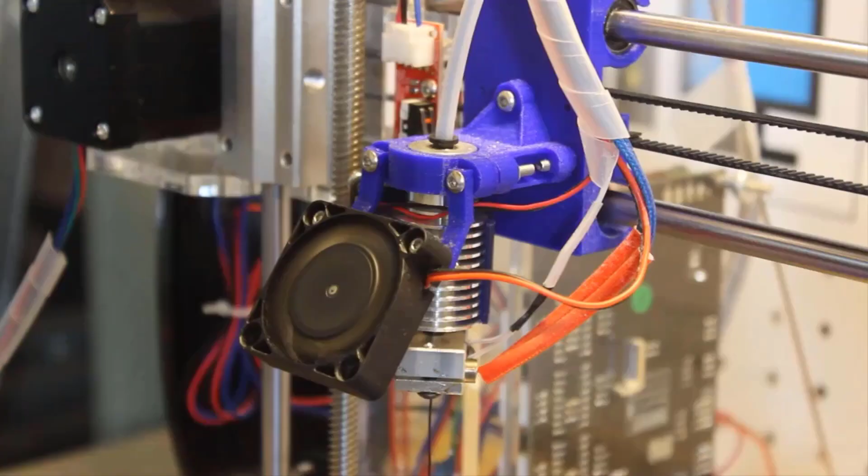FDM means fused deposition modeling. This is the most common type of 3D printer available on the market. Out of 100 companies using 3D printing, 80 companies are using FDM type 3D printers. So we can understand the market dominance of FDM 3D printers.

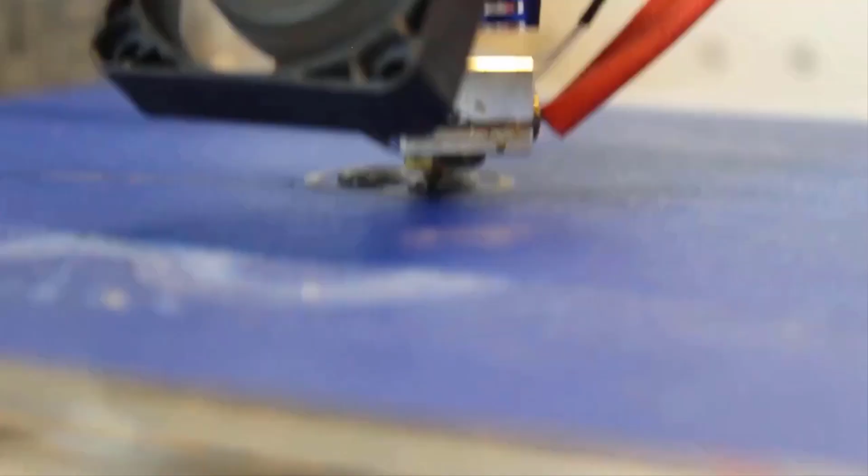So in this lecture, we will talk in detail about how FDM 3D printer works, what are the different components used in the 3D printer, and what is the mechanism of FDM 3D printer. Let's start with the working or anatomy of the 3D printer, like how FDM 3D printer works.

So what is the motion of the print bed, the build platform? In some types of FDM 3D printers, the Z-axis also moves. Once one layer is successfully printed, the platform will go down by one layer. In some cases, the extruder will move in all three directions, X, Y, Z. So this is how the 3D printer works.

Let's understand in detail the movement of the 3D printer. Here you can see these are the stepper motors and lead screws. All the motion and movement of the 3D printer is given by the stepper motors and lead screws.

If you ask how many stepper motors are present in a 3D printer, we can say there are 4 stepper motors: one for X movement, one for Y axis movement, one for Z axis movement, and one for extruder movement.

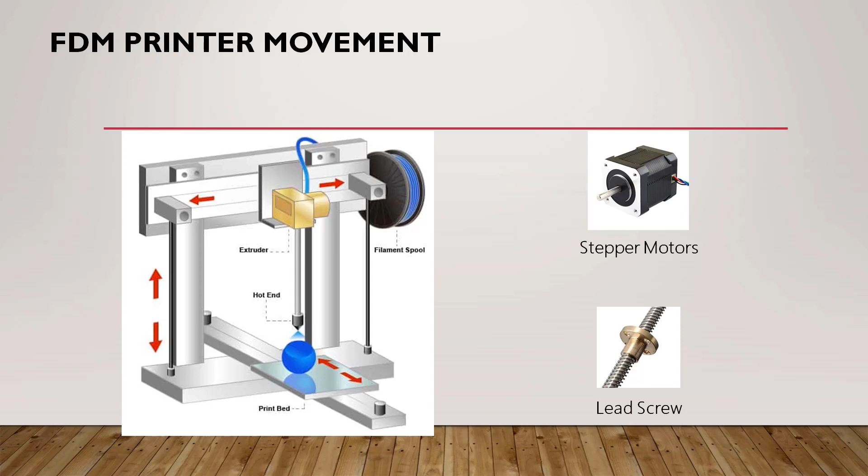Lead screws are those on which your bed will be moved. As you can see in this diagram, on this lead screw your bed will move, and other rotational movements will be based on the stepper motor. The stepper motor will rotate, then the lead screw will rotate, and the assembly attached to the lead screw will also rotate. This is how the movement of the 3D printer works.

In the beginning of the lecture, I told you about the extruder, that filament comes to the extruder and then goes to the nozzle. The extruder is the main part of any 3D printer, and the 3D printing process fully depends on how the extruder works. So let's talk about the extruder.

If I divide the extruder into two parts, there are two ends: one is the hot end and one is the cool end. The upper portion of the extruder is called the cool end, and the bottom portion is known as the hot end.

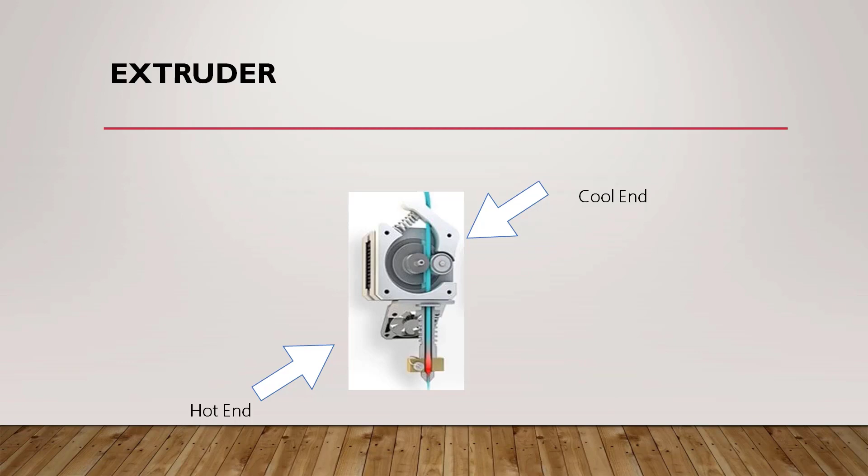Let's talk about the cool end, how it works. In the cool end there are three important components: first the stepper motor, second the hobbed gear, then the idler gear. When the stepper motor moves, the hobbed gear will also move, and the idler gear will also move, and in between we insert our filament.

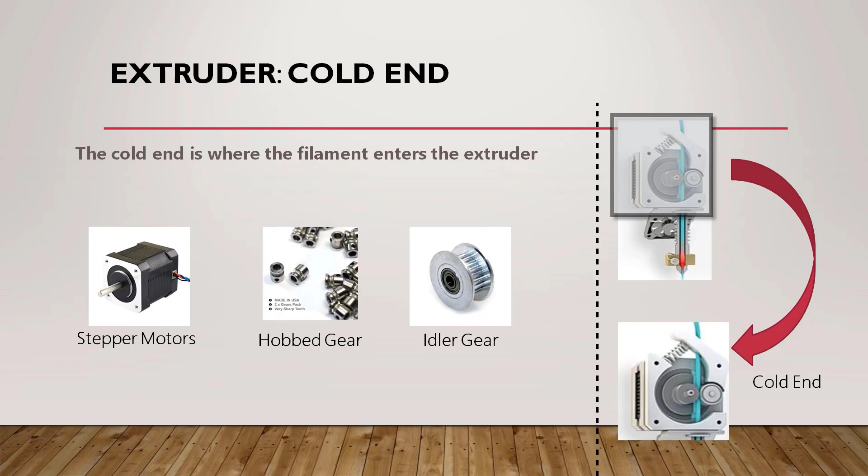So if those gears will be moved, then our filament also be moved, and this filament will go downside by the movement of these gears and stepper motor. Once it goes downside, it goes to the hot end.

So basically, what is the difference between hot end and cold end, and why we need two ends in a single extruder? As we know, when your filament goes to the nozzle, because of the high temperature at nozzle, your filament will be deformed and melted down. As the temperature of nozzle is too high, it is possible this temperature will go upside at the cool end, and before entering the nozzle, the filament can get deformed. And if this happens, that at the cool end your filament gets deformed and melted, then your nozzle will be choked and no movement of filament is there.

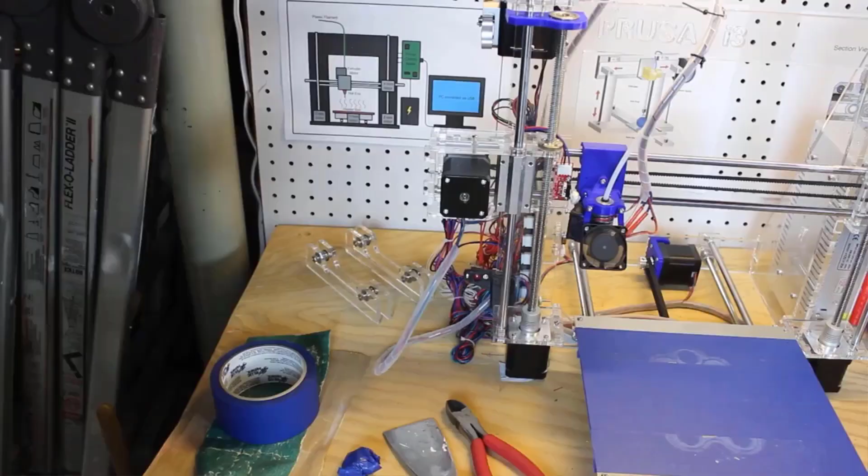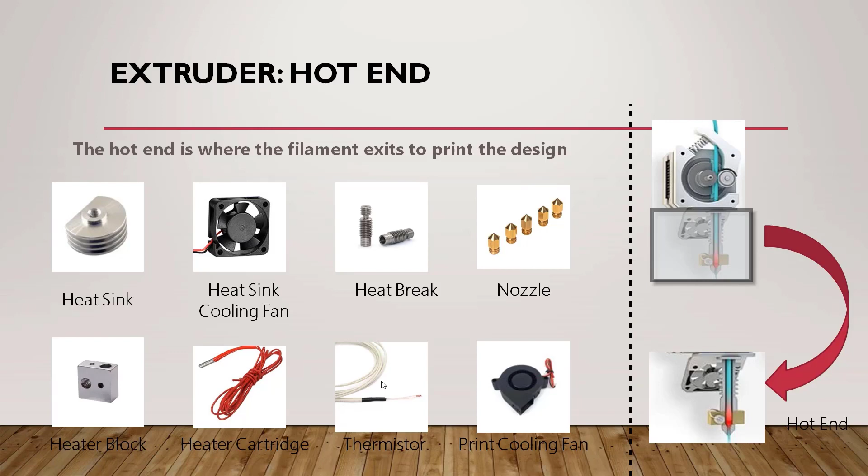If we want our temperature to be 220 degrees C for PLA, then this thermistor will maintain our temperature. Once we start our 3D printer, temperature will rise like 30, 40, 50, 70, 120. It increases rapidly, but at 220 degrees it stays because of the thermistor. These are the components used in the hot end to maintain the temperature and the working of the 3D printer. So I hope you got a fair idea about what is hot end and what is cool end.

Now coming to the hot bed plate. The hot bed plate is a bed where your model will take place. If you are using PLA, there is no need to heat your bed. But if you are using nylon, ABS, PETG, these types of material need some hot bed, because hot bed means giving some temperature to your bed. Once the layer comes down to your bed, it gets settled and sticks to the bed. Sometimes, if your bed is not hot, your layer will not stick to the bed and your whole model will not turn out like you wanted.

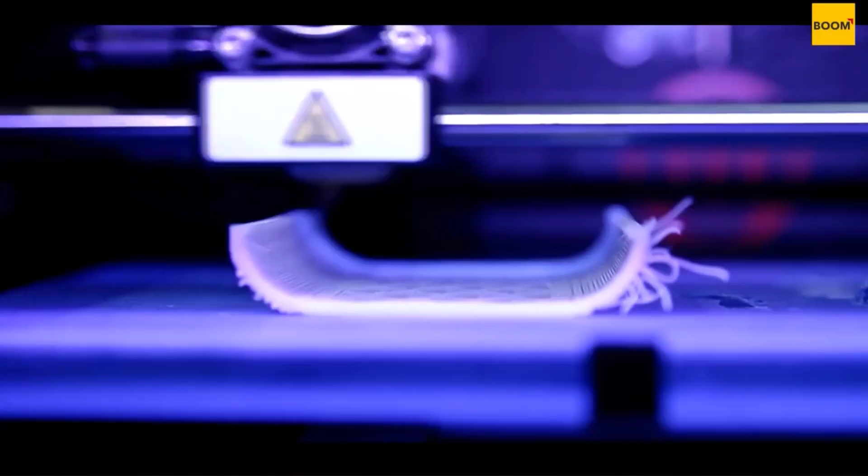So for some materials we need a hot bed, and for that we have a gun heater here, and we give a temperature of around 50 to 60 degrees at the hot bed. I hope you got an idea about the use of hot bed.

Now there are some few parts like the frame. The frame is the metallic assembly which assembles our 3D printer. Then the print spooler, as you know, this print spooler holds the filament, and this filament goes to your extruder, and there are end stoppers. Stoppers are there.

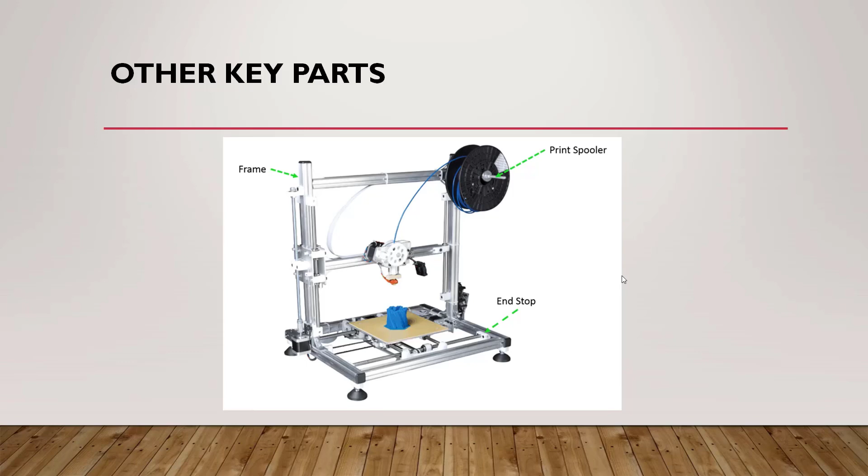Suppose your bed size is 40mm, and if your extruder is moving towards that 40mm extent, there will be a stopper at 40. So when your bed hits the stopper, it will stop and reverse its direction. This is the use of stoppers. Stoppers are present for X direction, Y direction, and Z direction also.

I hope you got the understanding about FDM 3D printer. Now what are the different advantages of FDM type 3D printer?

First is budget friendly. It is very budget friendly. In the market it ranges from 15,000 to 20 lakh, depending on what type of 3D printer you require and what configuration you need. In FDM 3D printer you may need multi-extruder or one extruder, a certain bed size, industrial 3D printer or prototyping use - it all depends, but this is very budget friendly. If you are a beginner and want to purchase a 3D printer, you can get one for 15,000 also.

Then filament is reusable - whatever filament we use, like polymers, those are reusable after making a prototype. If you want to reuse it, you can convert it back to filament. Then cloud server printing - you can do your printing via cloud server also. I may be sitting here, but if my 3D printer is at a remote place, I can send my model through the cloud and it can be generated there.

Then it's less complex - as you have seen, the working of a 3D printer is very simple, so it is less complex. Easy ergonomic layer - ergonomically it is very stable. Then variety of material choices - there are lots of material varieties you can use in FDM 3D printer, like PLA, PETG, nylon, ABS, which I've told you about. Then easily portable bed - the bed is very portable, you can change it anytime. Then compact design - the design is very compact. These are a few advantages of FDM 3D printers.

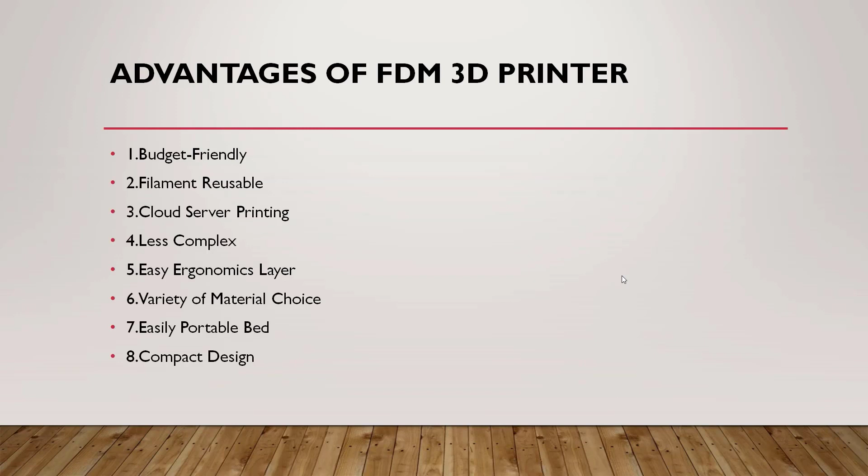For everything there are advantages and some disadvantages also. So let's talk about disadvantages of FDM 3D printer. The first is rough surface finishing. The finish is rough compared to other 3D printing processes. However it does finish, but compared to metallic 3D printing processes, here the surface finishing is rough.

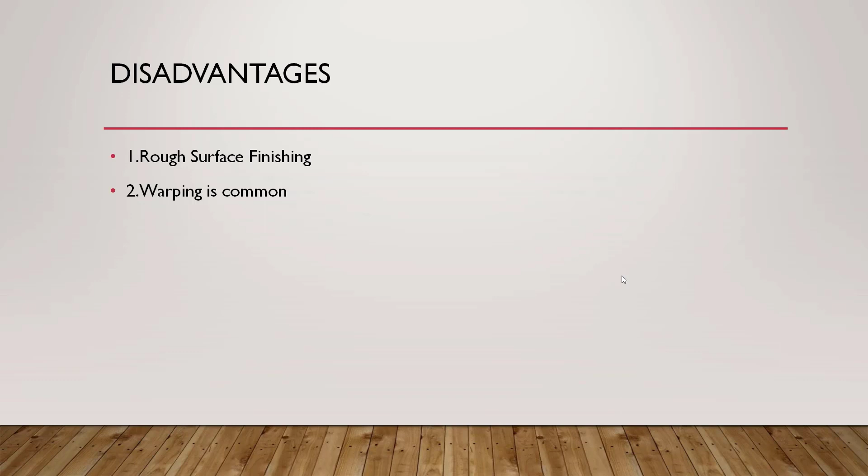Then warping is common - because we use polymers, after cooling it's possible that your layer will warp, so warping is very common. Then nozzle clogging is also very common.

Nozzle clogging is an area you need to focus on, because I have been using 3D printers for the last 5 years, and what I've observed is there is a tremendous amount of problem with nozzle clogging. When you complete your 3D printing and the product is done, if you just switch off the 3D printer, the filament inside the nozzle solidifies. Next time you start, you have to clean the nozzle first before starting printing again. So make sure that after completing your product, you remove the filament from the nozzle, so next time you won't face nozzle clogging.

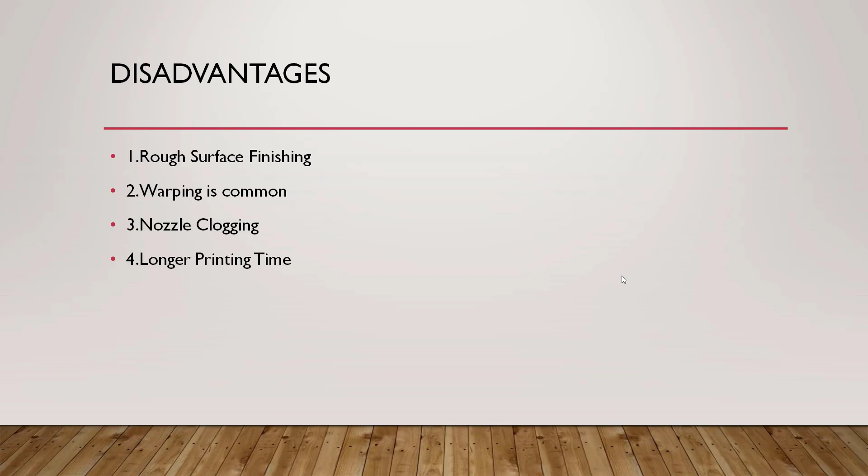Then longer printing time - the printing time is longer, as you saw in Cura software also. When we slice something, it gives the timing, which was around 4 to 6 hours, depending on accuracy and other factors, but the timing is longer.

Then adhesion problem - sometimes, as I told you, the first layer won't stick to the bed and your model won't turn out as wanted, so adhesion problem is also there. Then weak in strength - because we use polymers, these are weak in strength. These are some disadvantages.

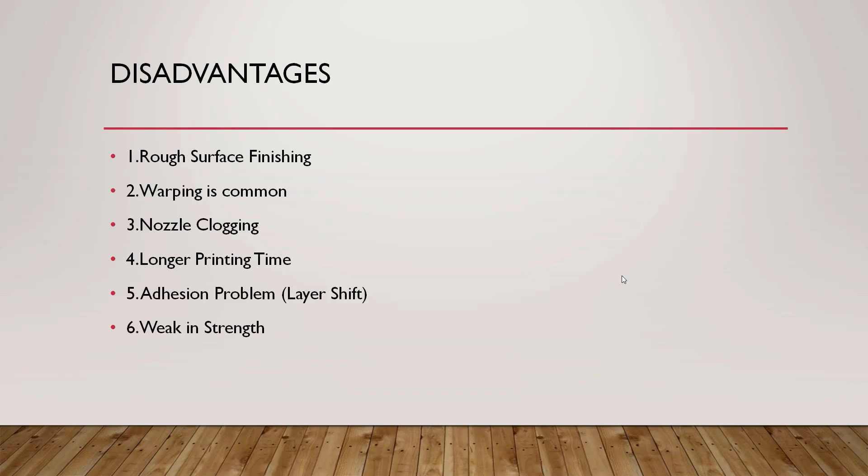I hope you got a fair idea about how FDM 3D printer works, what components are there, what advantages are there, and what disadvantages are there.